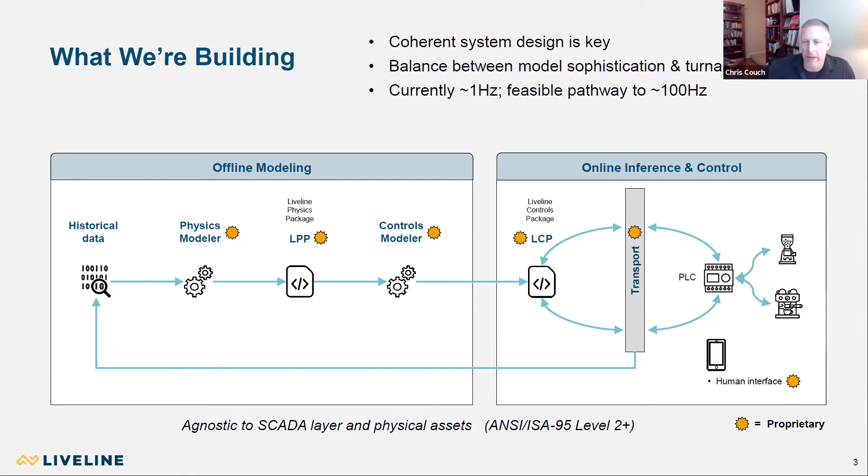And our experience is that it's always possible to build better models, but we're engineers, we're not theoretical data scientists. So the question is, what's good enough? And a lot of what we've built and the way we've balanced this pipeline out is really geared towards solving that problem.

So another question you might ask is why we're building it. So what? And this slide really gets at the answer. Cooper Standard is in a segment of industry that falls in this chain here. So this is very different from, say, assembly of automobiles on a production line with discrete operations; we're talking about continuous flow manufacturing.

In our case, we deal a lot with chemicals, with polymers, but also we know that what we're doing is applicable to some other extrusion-based industries, whether it's wire and cable, for example, some segments of the food and beverage industry. Anything with continuous flow processing that has reasonably complicated process physics is potentially an area where we can play.

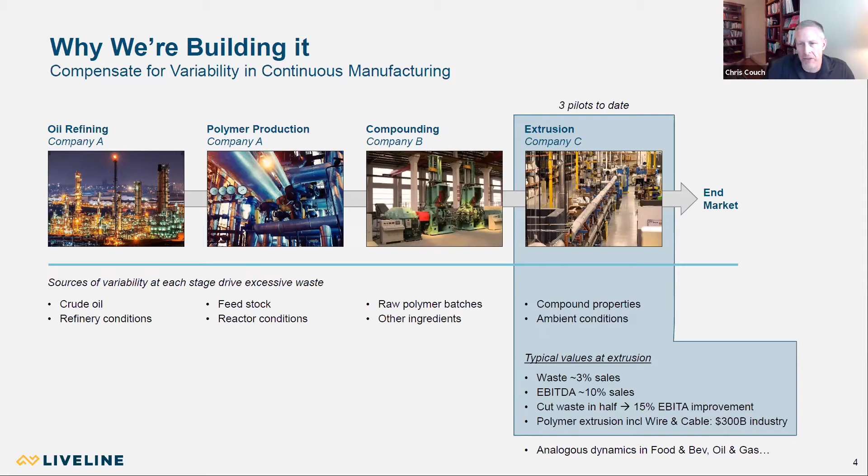Specifically in our space to date, there is huge opportunity to improve waste, to reduce scrap. These tend to be very energy intensive processes. So any time you can run better and less wastefully, you have a big environmental impact in terms of energy, in terms of waste products that aren't friendly to recycle. So a lot of high leverage from solving this problem and doing it better.

This slide is an example of one of our pilots, just to give you a little more insight into physically what we're working on. The part that you see here is what we call a sealing profile. So this goes around doors and windows in vehicles. And although when you get in and out of your car that may look a little simple, it's surprisingly complicated, and it has to hold very tight tolerances to prevent water leaks in your car when you're driving on a highway and it's getting sprayed with water at speed.

And these types of products are typically composed of 5 or 6 different materials. Most are polymeric. They are reactive, and so when you blend these material streams together to extrude these parts, you have a lot of physics going on. You have chemical curing. That's all influenced by ovens and temperatures. You have physical forces pulling this stuff down the line. You have gravity trying to make it sag.

And worst of all, the raw materials for these kinds of products are polymeric, but ultimately organic, right? And no 2 barrels of oil are ever the same. And so no 2 batches of plastics or rubber that we would get from suppliers at companies like Dow and Exxon are ever the same. They're supposed to be the same theoretically, but they aren't. And those differences turn out to be really important because of the highly nonlinear physics in these processes. And ultimately, that's why they've been difficult to automate and control in the past.

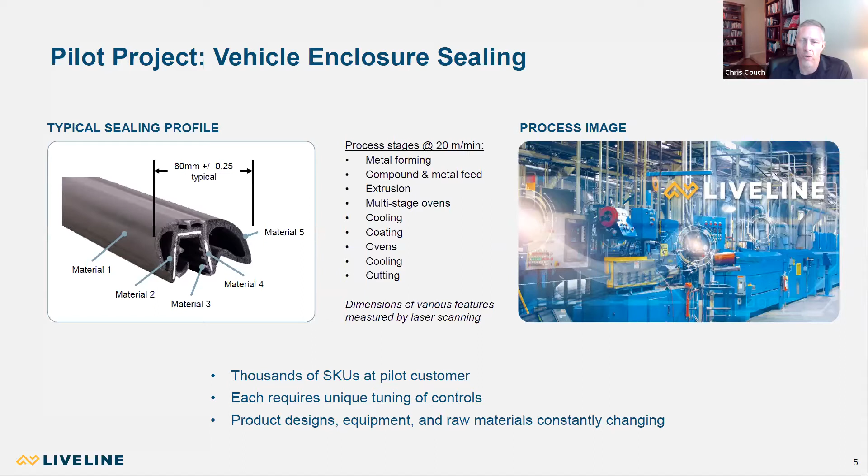So very difficult problem. Even if you can sort of tune a controller, let's call it the old school way, it's immediately irrelevant. And so we have to have a different way to attack this problem. Some of this I talked about. We do have to hold very tight control. We're talking tenths of millimeters on some very squishy and variable products.

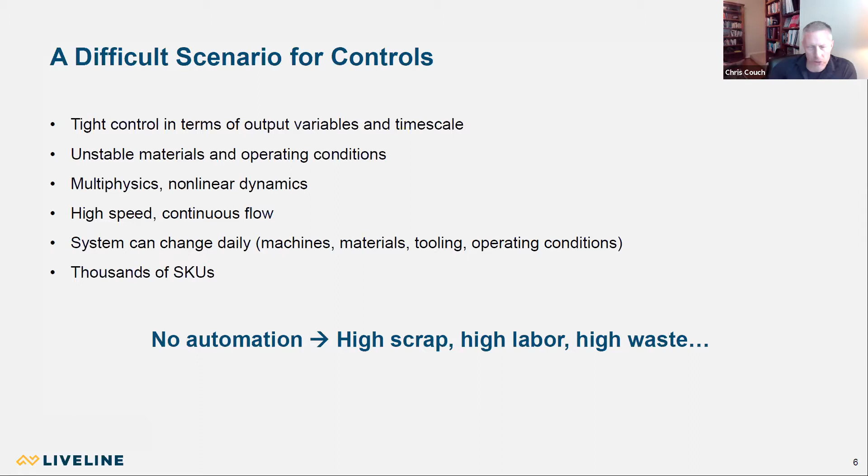These tend to be high-speed extrusion operations, so stuff is just flying off these lines. A lot of nonlinear dynamics. You have, again, physical forces. You have chemistry. You have heat transfer. A lot of complicated flows mixing. So not an easy problem, actually.

We went at this originally, I guess more than 2 years ago. We tried to do it the old school way. I assembled a group of some very, very talented controls engineers. We took one product out of the 20,000 on one line and said, look, can we just beat this to death and try to get this in tune using classical techniques?

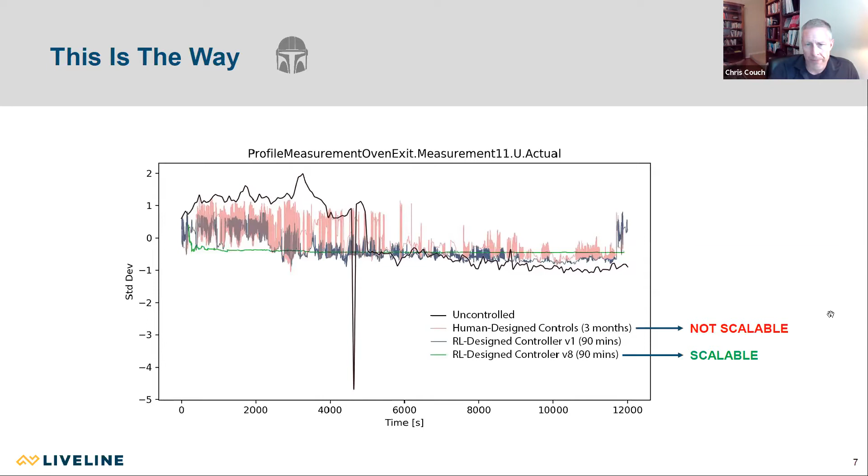One thing you will find with these industrial processes is the plants tend to be old. Because they're so manually intensive and have such tricky process physics, you will find very seasoned, experienced operators and technicians in these plants. We have facilities with products where there is literally one person in the facility that has the intuition and the touch to keep that line in control. If they don't come to work, we can't make those parts.

It's a very difficult talent question, because these aren't necessarily glamorous jobs where you're watching these industrial lines, looking at dials and making little tweaks to knobs all day long. It's not easy to find great talent and say, why don't you come here and stare at these dials for a year or two until you get a feel for this line, because it's really touchy and complicated, and then maybe you can drive the line after that.

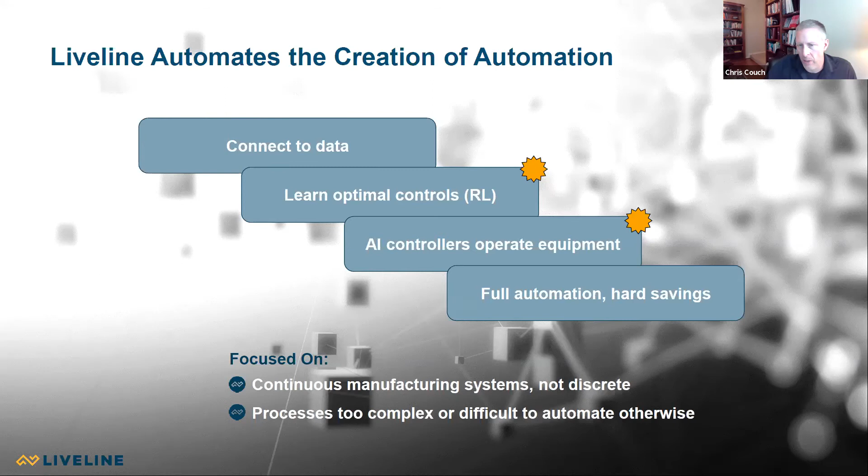All right. So in summary, at least in terms of the company, and we'll talk more tech in a second, we're trying to automate the creation of the automation. We're trying to learn controls from the data and then use those controls to operate equipment in real time, and a lot of benefits we think will come from that. Okay. I don't have a slide on it, but in terms of our pilots, what did we see?

So we were in 3 facilities, one in Michigan, one up in Canada, and then one in North Carolina. And we saw in those facilities scrap and waste reductions of 58, 52, and 57% for those 3 pilots. So pretty compelling. This is not just a little better, this is a lot better.

And we saw reductions in unplanned downtime in these facilities on the order of 80%. And that's just because as everything stays in control, there's less blockages and jam ups and things that happen in the lines. So very, very compelling pilots. Again, this is not marginally better, at least for these kinds of industrial processes, it's significantly better.

Okay, so I'm going to talk a little more tech here. I guess I can pause if there are any questions. We can take them here. Otherwise, I'll keep going. Good. So Chris, probably good to keep going. If people ask questions, at the end generally. All right, I'll keep going.

So we did a lot of things the wrong way. We went down several blind alleys trying to solve this problem. And I don't usually talk about those to anybody but technical audiences, because most people don't care, I think. But I thought maybe you'd find this interesting. So we did start originally down the journey looking at open loop simulation based control. So again, very complicated physics.

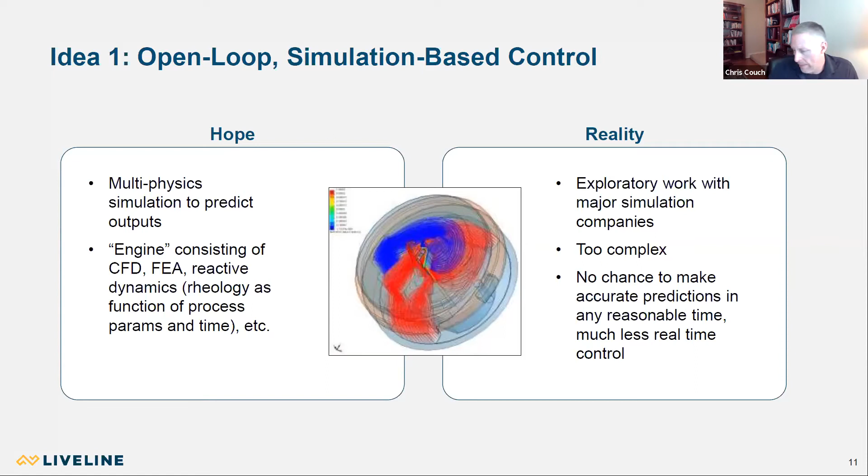Very, very complicated flows. Not to mention, the material rheology is changing with temperature and time. These materials are curing and they're cross-linking and all sorts of interesting things. So not the easiest problem to simulate. Then there's all the downstream stuff going on with ovens and curing and other mechanical factors. So we did try to make the grand simulation here, but it was a bridge too far, and there's just no way to do this in any reasonable time. Certainly not in the context of any sort of control loop, and so we did abandon that fairly quickly.

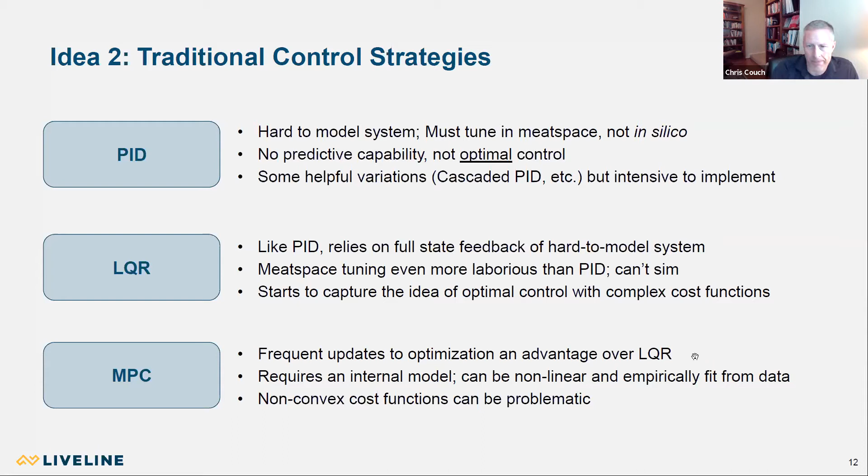Okay. We did do one more thing though before landing on our answer. We did try to use MATLAB as the basis for some ML-based controls methods. A lot of us with controls backgrounds said, look, we're trying to make closed-loop systems. Obviously, we go to MATLAB, right? We go to Simulink and design it. Isn't that what you should always do?

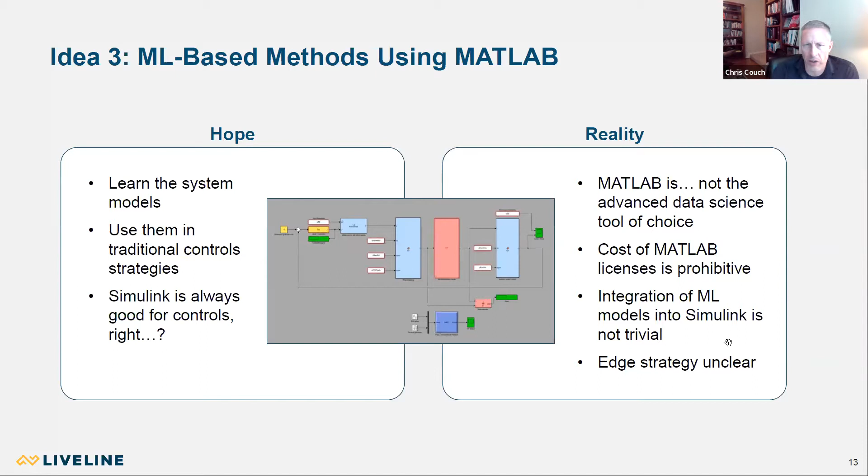I guess the best summary I can give you is that MATLAB is not the advanced data science tool of choice. And there's other issues. Licenses are cost prohibitive. It's expensive stuff. Integration of ML models is not trivial in this sort of environment. And then our edge compute strategy is not clear either. There's better ways to do it than to try to force fit this into that tool. But we did try.

So what are we doing? RL-based controllers. A lot of strengths with them. They are self-designing in a certain sense. So it does give us a dramatic reduction in the engineering workload and the data science workload, and ultimately is the key to helping us scale this out globally. It really naturally accommodates some pretty sophisticated trade-offs that we have to deal with in terms of our objective function, or cost function, if you will.

So I'll give you an example of that. If we were just trying to hold a numerical dimension to spec, that's not so bad. But we may have sort of Boolean style characteristics that we care about, right? Does it meet this characteristic, yes or no?

A very nonlinear objective. And reinforcement learning models tend to pretty naturally accommodate some very sophisticated, relatively complicated reward structures. So that's a big benefit to us. The other thing that's really cool is that the infrastructure it takes to do the reinforcement learning at scale does enable some additional functionality for us. So what do I mean by that?

As part of the core engine, the RL agents, if you're familiar with the RL approach, are looking at information. And one of the pieces of information is predictions about how the line physics are going to evolve the next few minutes. And because we know that, we have the ability to raise, for example, triggers that not only is the process going out of control, it's going out of control to the degree that we don't think we will be able to compensate for in a few minutes. It may be okay right now, but it may be going into an uncontrollable state in the future.

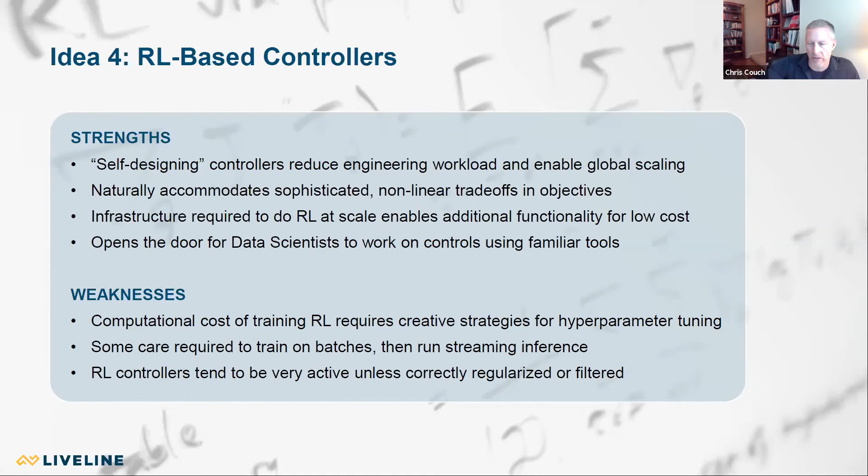And then the last thing is that the RL controllers do tend to be pretty active. And so we have a couple of strategies to regularize those, both in training, but also after they're deployed. We do some different types of filtering and guardrailing of the decisions they're making. And it's also an interesting area. I did mention the enhancements or the additional functionality that we get excited about.

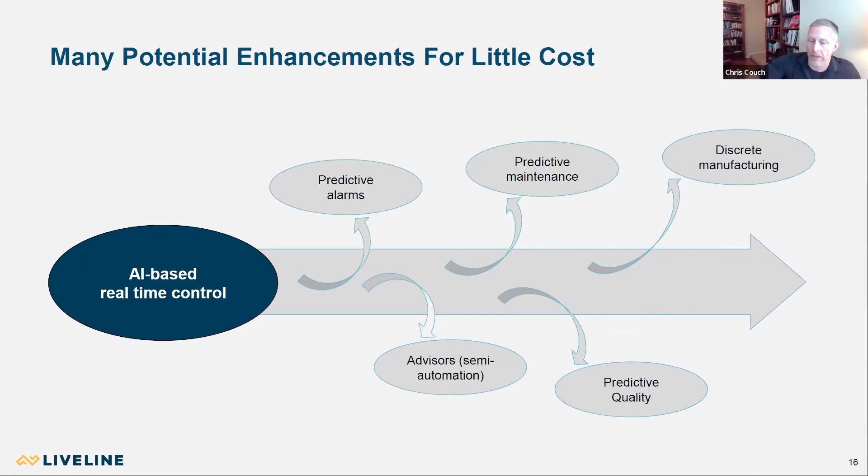Advisor type things. That is all stuff that for very, very little cost, essentially front-end app development, we can expose that functionality, some of which actually already exists inside the core stack. So those are additional products for us, and we think that's one reason why Liveline has a chance to be a successful company long term. So cool stuff.

In terms of our tech stack, this may be too much information, but I mentioned that we're building it from hopefully a 2021 data science viewpoint. We are hardware agnostic. We're very containerized. We can run in the cloud. We can run on-prem. The one thing that's maybe a little unique here is because of our application for real-time process control, we have to do inference on-prem at the plants.

And why would we do that? The reason is because we can't make the plants rely on any kind of connection to the outside world to be able to keep running, right? So inference is always local. But the harder training offline, that all tends to be in the cloud. But once again, we're very containerized the way we built this, and we're agnostic. We can go sort of anywhere we need to go.

The other thing that I think is unique about this application is this little line down in the plants that says the OPC UA bridge. So OPC UA, if you're not into industrial controls, is a very common communication protocol from the machine layer, the SCADA layer, if you will. And we plug into that, and then from there we take the data streams,